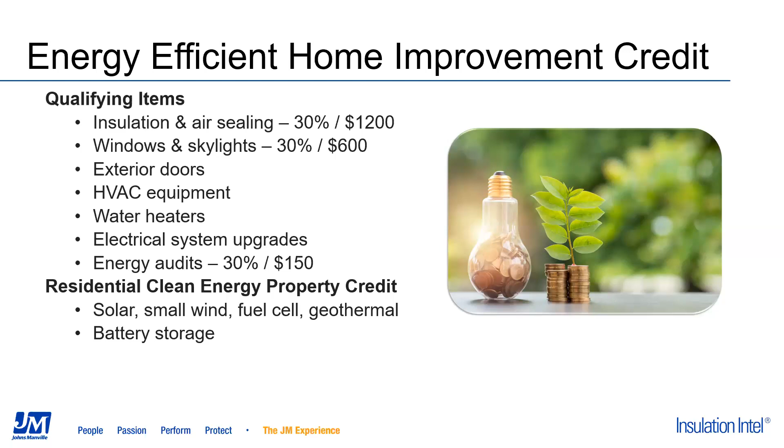And in terms of how efficient, how good do these things need to be for items like windows and doors, furnaces, water heaters, the most common metric that those items have to meet would be Energy Star. There are some other groups out there that also have efficiency requirements that sometimes come into play, related to furnaces and things like that. But in general, if items are Energy Star qualified, they will also usually qualify for the tax credits.

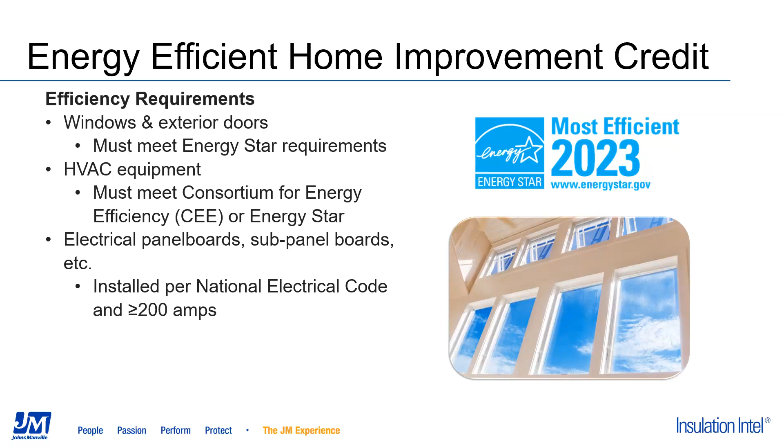For things like upgrading your electrical panel, that really just has to meet the National Electrical Code, and the panel, as we see here in that last bullet, has to be for greater than 200 amps. Again, the idea being we want the upgrades to be something that's aimed towards electric vehicle charging or adding solar to a house. When it comes to insulation and air sealing, it gets a little more complicated. Basically, the efficiency requirements for insulation and air sealing are tied back to the International Energy Conservation Code, or the IECC. And that's really the model energy code for most of the country.

For this year, for 2023, the requirements are that insulation and air sealing need to meet the requirements of the 2018 code. That's the best understanding of how the rules are being interpreted right now. After 2023, the insulation requirements are going to be pegged to the 2021 code. And the reason it is the way it is, and it's a little complicated, has to do with the language that's actually in the legislation itself. It basically says that the insulation that you install has to be compliant to the energy code in effect 2 years prior to when you did the improvement.

So it's very wordy and a little complicated, but the easy way to think of it is that in 2023, make sure that any insulation upgrades would ultimately be compliant with the 2018 code. And then going forward, 2024 and beyond, we're going to be looking at the 2021 code. As we go farther and farther out, the code that we'll have to meet will always be about 2 years prior to when we're doing the work. So I'm sure that there will be new resources that will get updated as we move forward. But in a nutshell, as best as we can tell, those are the guidelines.

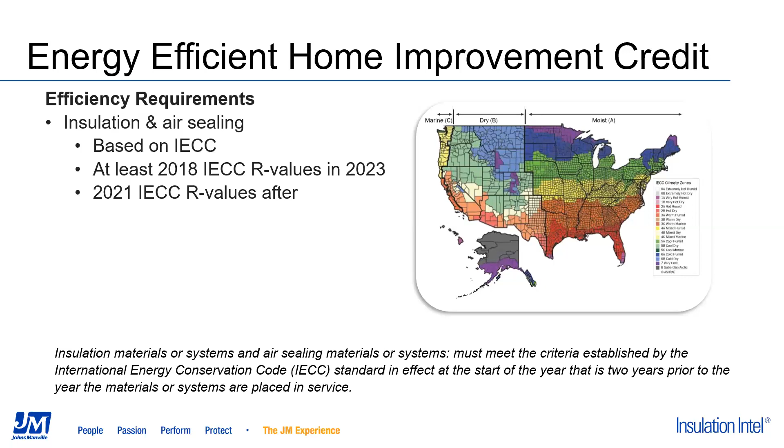And the map on the slide really shows the climate zones that the country is divided up into, that then pegs the actual insulation R-values that we need. And the next slide takes that to the next step.

They might upgrade the insulation in their floors, especially if their floors are over a crawl space, or floors for a bonus room over a garage. And then finally, basements would be another area, especially if somebody's got an older house, maybe the basement is unfinished and they want to turn that into livable space. Obviously, there becomes a good opportunity to either just install insulation for the first time or upgrade it.

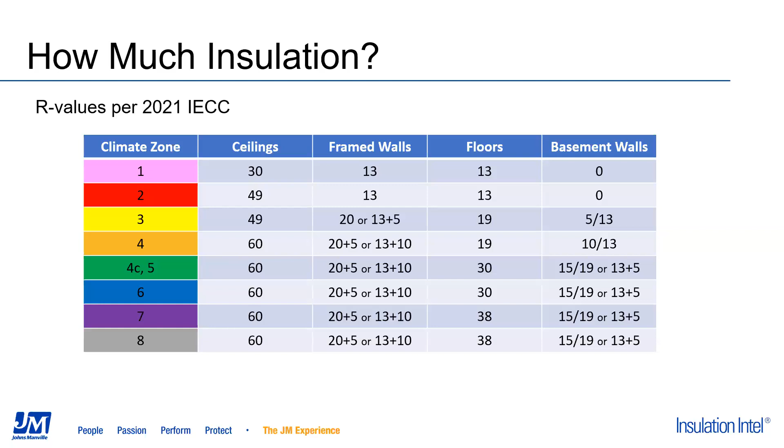And ideally, we're not going to be able to see that anymore once we've done our upgrades. So if we upgrade to R38 or R49, that's insulation that's going to be 13 up to 18 inches deep. And of course, we saw on the slide for the 2021 energy code that it sometimes even called out R60, and that really translates to 20 inches of insulation.

And for all of these numbers, when it comes to qualifying for the tax credit, what we need is the total. So we don't have to install brand new R38 or R49, but the total needs to end up being there.

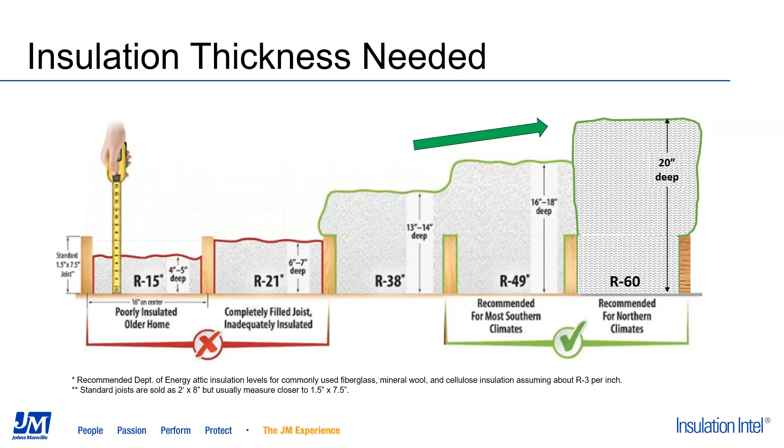And with that, I am going to hand it over to Tom, who is going to walk through how this can translate into jobs. Thank you, JR. So I think the biggest question that's out there, we're going to take a look at warm climates and cold climates.

I'm going to keep this very simple. We're going to look at the easiest place to do the retrofit, which is in the attic. And as we know, 80% of all of the energy transfer happens through the lid. So this is a great place to see a significant benefit very quickly.

So if we look at a warm climate, and these are homes that were built pre-2009, we're just going to estimate that most of these homes there have an R21. So they're going to need another R17 put in that attic to get to an R38, which again is the 2018 code. The example I'm looking at is a 1,000 square foot attic. Each one of these are going to be the same size attic.

And I just went on the internet and I found out what our Climate Pro loose fill insulation is going for, which is about $75 a bag. So for the material cost, you would need about 6 inches of insulation put in, which is roughly about 7 bags. The material cost is $525. So applying that tax credit to that, that homeowner then could claim another $158 off their taxes, which really means that their effective cost for that insulation is $367.

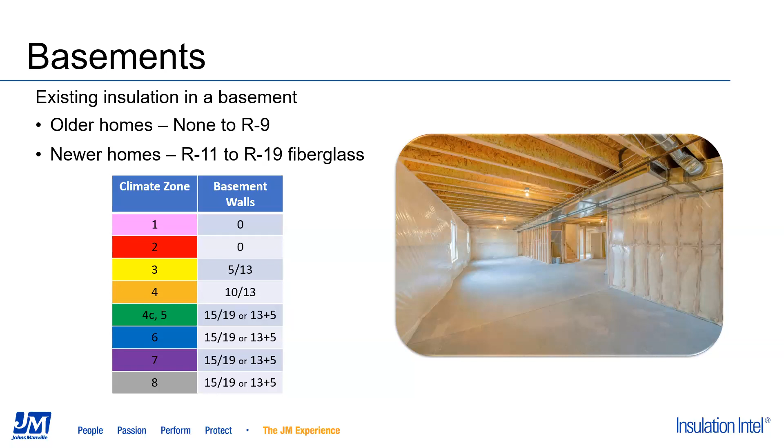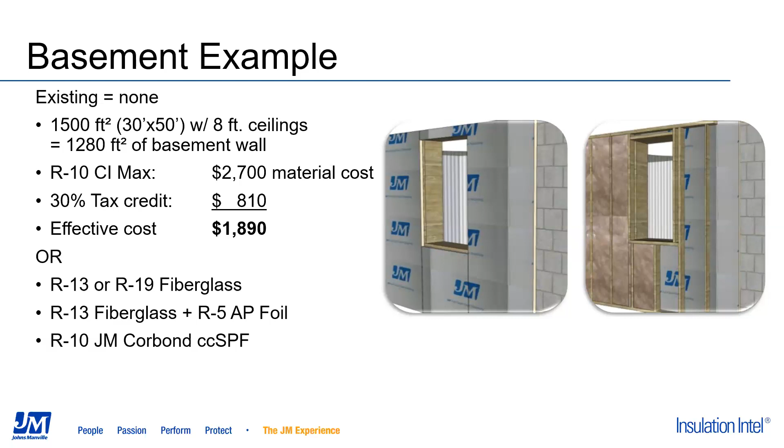Of course, there's other options, and we're not going to dig into all of the permutations of that. But if somebody were actually finishing their basement, like the drawing on the right, where maybe they're going to frame up walls, hang drywall, then we could be putting in R13 or R19 fiberglass, which would be a less costly option. Or again, kind of to Tom's examples in the attic, we could be doing this in closed cell spray foam and have just an awesome, air sealed and insulated basement. But again, we could realize pretty good savings from the tax credit for these sorts of projects.

The other example that I wanted to touch on is crawl spaces, right? Especially in the Southeast and kind of middle parts of the country, lots of homes are built over crawl spaces. Again, in older homes, if they're really old, they might not have any insulation at all. If they're not so old, they might have R13 or so. Newer homes might have anywhere from R13 to R30. And again, most of this product is fiberglass that's been installed up under the floor. And there's nothing wrong with that at all.

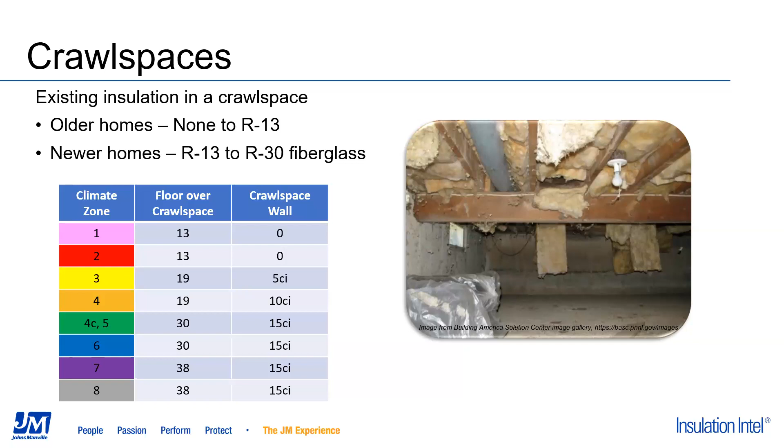Again, the table on the left side of the slide shows what the insulation requirements would be depending on the climate zone to qualify for the tax credit. So a good example would be climate zone 4, right? So think Tennessee, the Carolinas. Again, lots of houses on crawl spaces in these areas. And here, the example that I really like to highlight would be to transition away from the fiberglass and the floor system and going with a spray foam, going with what's called an unvented crawl space, right?

So again, looking at the same kind of example, the 30 by 50 foot home, this time instead of an 8 foot tall wall, it's not a basement. It's just a crawl space. So if it's only a 3 foot tall wall, we're looking at just under 500 square feet of crawl space wall. And if we were going to install R10, this time it would be JM's Corbond III or 4 closed-cell spray foam. We'd need about 1.5 inches thick. That would be about 720 board feet or so. Now I'm defaulting to simple math because I don't really know if this would cost the full $2,000 in material for that. But if it costs $2,000 in materials, there's $600 of tax credit that the homeowner can get.

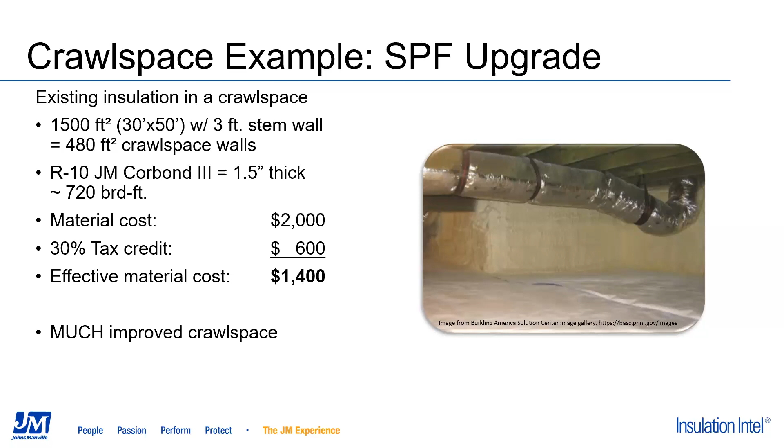And then of course, going back to the reasons why we retrofit, the tax credit is gravy on top of this, but the real benefit here is that we've got a crawl space that looks like the one in the photo where our moisture problems are gone. This crawl space now acts like a little short basement. It's moisture managed. It's just a far, far more durable solution for the homeowner. And they get a discount on the materials used to create it and make it be that way.

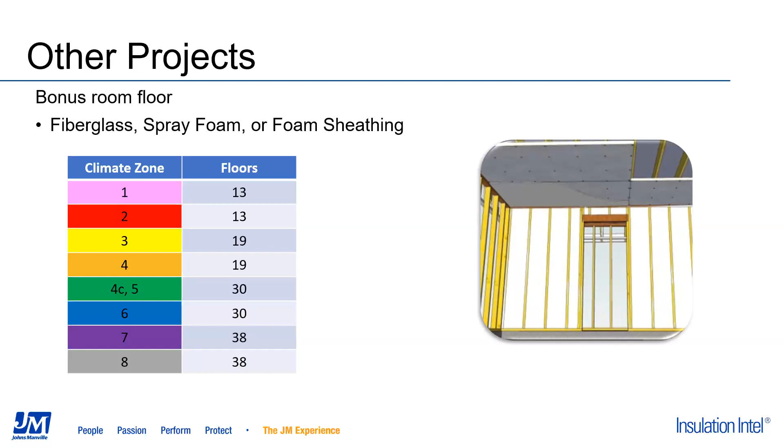Tom, I'm going to hand it back over to you for some of our takeaways today.

Oh, thank you, JR. As the contractor, you're the expert out there. So you would know how to read the code standards and know how much insulation someone needs to take advantage of this opportunity. And kind of my counsel to everybody on the phone right now, make it as easy as possible for the customer. There's an IRS form out there.

So making it very simple, you would walk in and say, look, this is what the material cost. Here's the form. Here's your saving. Here's the bid that goes behind it. If you ever get audited by the IRS, you are rock solid. And now you have a more comfortable home. So make it so easy that the homeowner cannot say no to you.